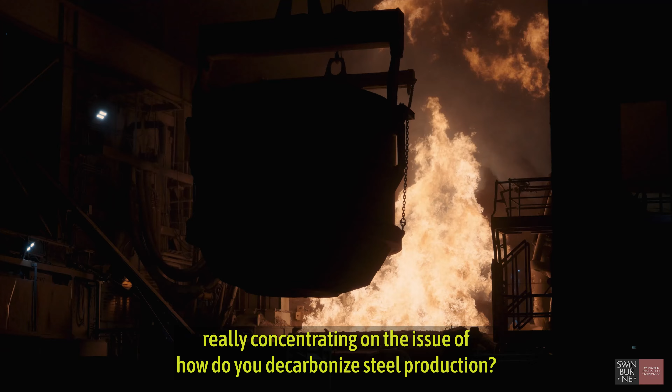If we're going to talk about decarbonising steel, we need to understand steel. Steel is obviously an incredibly successful material. I just want to bring to your attention that the building that you're in is held up by steel almost certainly. You go on a train made from steel. The rails are made from steel. You're in a house with all the goods around you, etc. So there's a tremendous amount of steel, obviously, in our society.

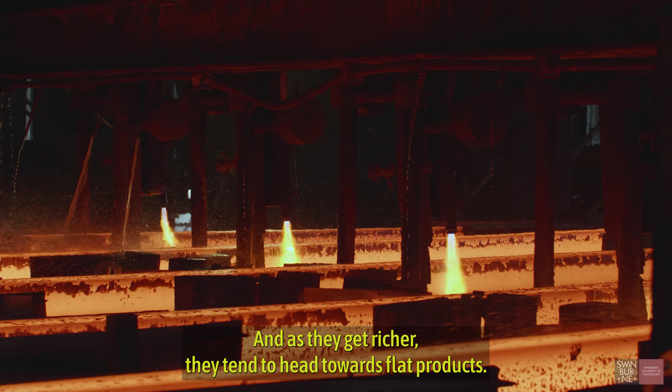Steel has a very large bearing on where you're up to in technological development. So countries obviously value steel and they want to make sure that they have a good supply of steel. The steel requirements they want change with time. They tend to go from long products, beams and rails, and as they get richer, they tend to head towards flat products, like the things you make cars and refrigerators from.

Steel also makes a very significant contribution to CO2. People estimate it's around about 10% of the CO2. A lot of people think that it's the next cab off the rank after we've been dealing with electricity supply and also transport. So there's a lot of social, political pressure around that issue, of course.

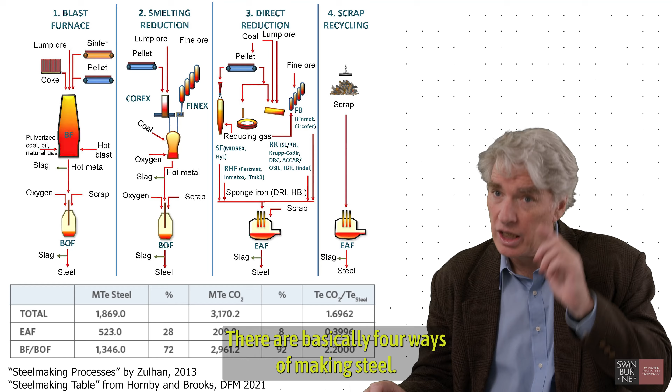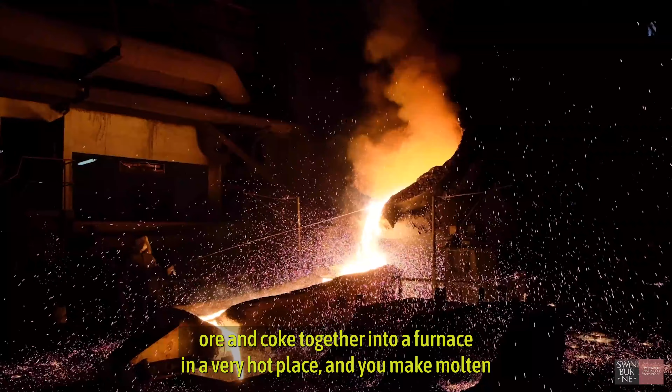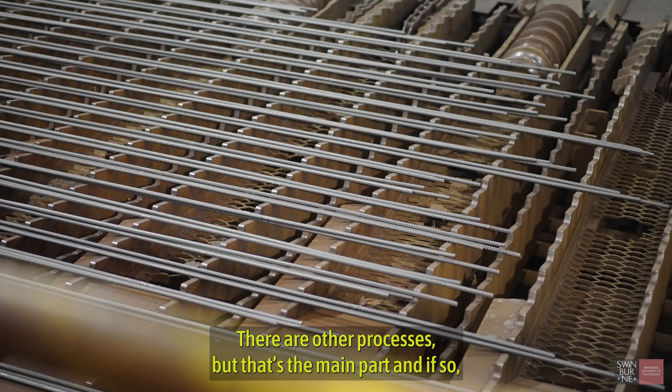There are basically 4 ways of making steel. We're going to highlight in this talk 3 main ones. The first one is the blast furnace route, where you basically bring ore and coke together into a furnace in a very hot place, and you make molten iron, which is an impure form of iron. That iron is then refined in a BOF, and you make steel. There are other processes, but that's the main part. It dominates world steel production, about 70% of the world's steel.

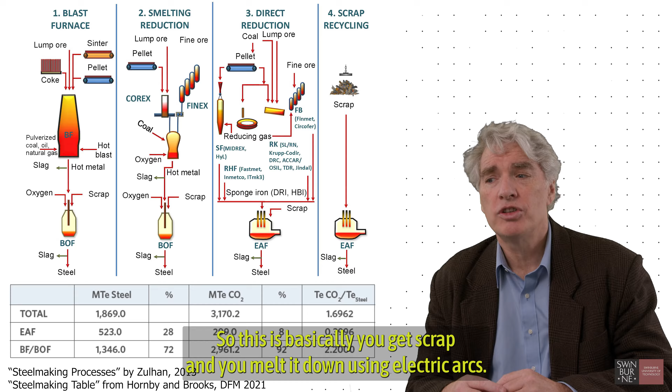It also dominates CO2. The next important one is scrap recycling. This is basically where you get scrap and you melt it down using electric arcs and then refine it and then cast it. At the moment, this is about 20% of the world's steel.

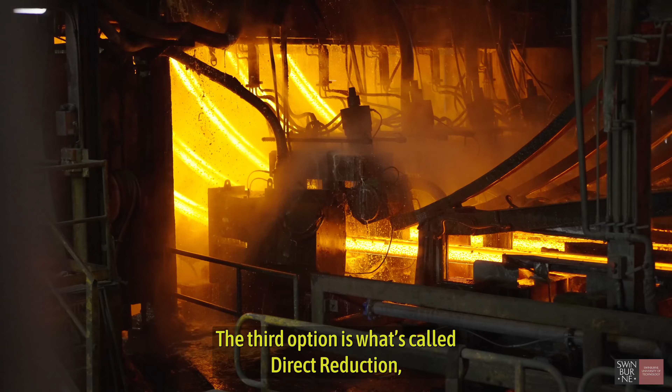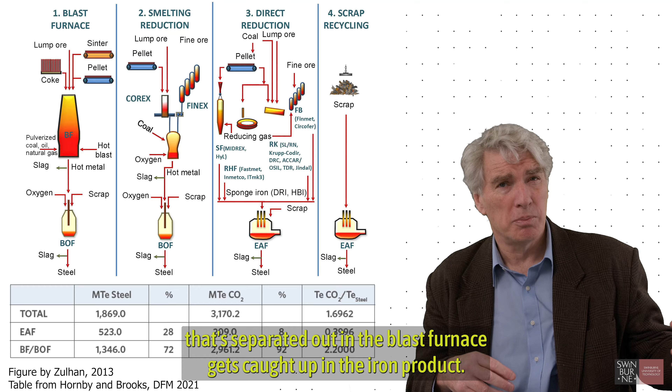The third option is what's called direct reduction. You basically only go to a solid product in the iron making step, you don't go to a liquid product. This means that all the slag and gangue that's separated out in the blast furnace gets caught up in the iron product, so it's like a low-grade iron. This is often used with natural gas instead of using coke or coal. This is then melted in an electric arc furnace, and this is at the moment about 10% of the world's steel supply. Everybody thinks that this is likely to grow in the decarbonised future, which I'll explain why.

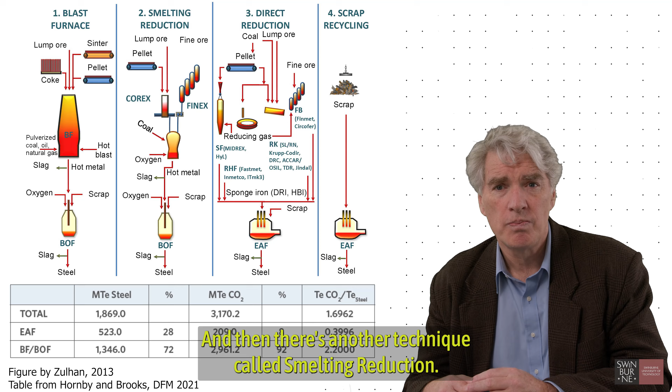There's another technique called smelting reduction. Smelting reduction is so small, I don't think we need to spend much time on it today, but it's an attempt to make liquid iron without having to use coke, basically.

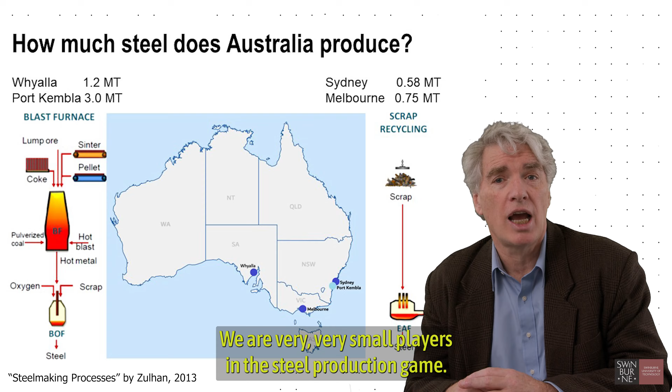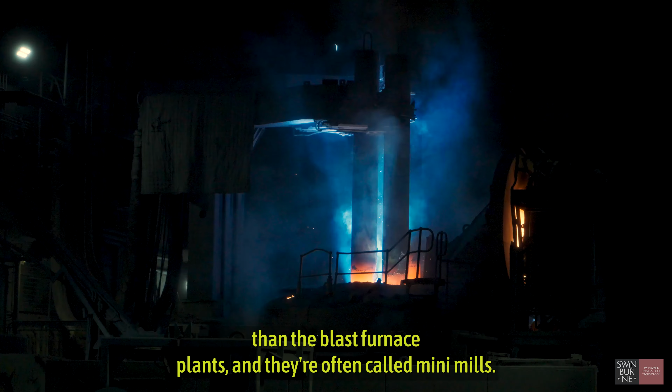Who makes steel? Well, there's about 1850 million tons of steel made every year in the world, and it's dominated by China, India, Japan, and the USA. We are very, very small players in the steel production game. We have a couple of blast furnace plants, one in Wollongong and in Whyalla, and they make 3 million tons in Wollongong and about 1.2 million tons in Whyalla. We have 2 electric smelting plants in Sydney and Melbourne, at sort of 0.58 and 0.75 million ton scale. It's very common that electric smelting plants are smaller than the blast furnace plants—they're often called mini mills. So that's part of the nomenclature in steel.

We are, however, a huge player in the game of producing the ore that goes into the steel, and we dominate export of ores. We're up around about 900 million tons of ore—an incredible number. If you go to Western Australia, up to the north around the Pilbara, you'll see enormous trains and trucks transporting vast quantities of ore. And of course, it's a great generator of wealth in our country. One of the interesting things people ask is, could we go circular and just live on the scrap?

Well, unfortunately, when you look at the scrap produced in the world, it's not really enough. It's about 40 to 50% of the requirements. In other words, we don't have enough scrap to make the steel. So we can't go circular.

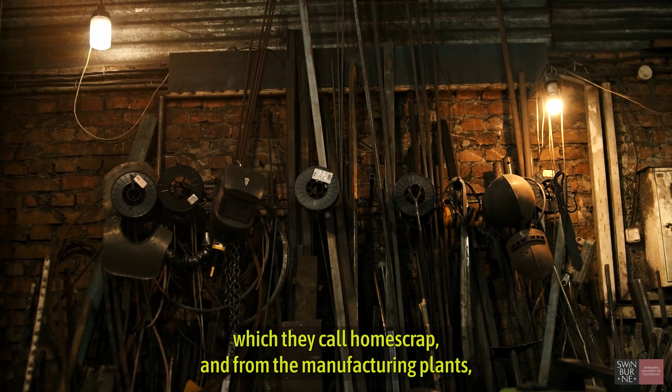But there's also issues about the quality of the scrap. So there's scrap that comes from around the plant, which they call home scrap, and from manufacturing plants, which is called prompt scrap, and it's quite good quality. But the scrap from obsolete cars and bits and pieces of machinery, etc., are often very mixed and of poor quality. So that's one of the big challenges facing the steel industry, is how to deal with this tsunami of obsolete scrap coming towards us.

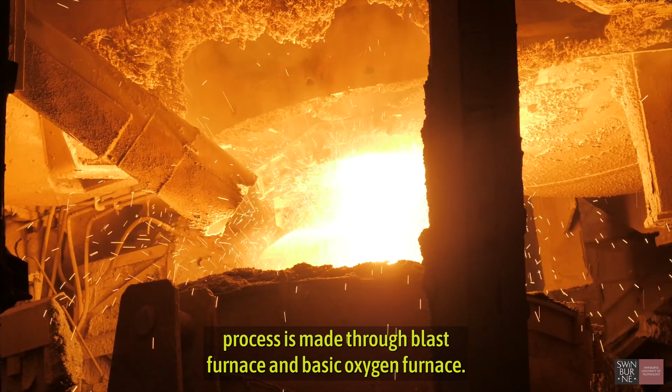Steel contributes to more than 7% of the greenhouse emissions. Now in Australia, around 75% of the steel process is made through blast furnace and basic oxygen furnace. So then it's only 25% from EAF, and we know that using EAF is based on scrap. Which means that we need to know how much scrap that we have in Australia, and also the quality of the scrap in Australia.

All right, so what are the key issues? Well, I think first of all, we need to start off with the Paris Agreement on steel. The Paris Agreement and the repercussions on the steel industry basically says that we're going to reach net zero with CO2 by 2050 to try to prevent climate change. We're going to have to reduce the CO2 by 90%. And that is a very large reduction.

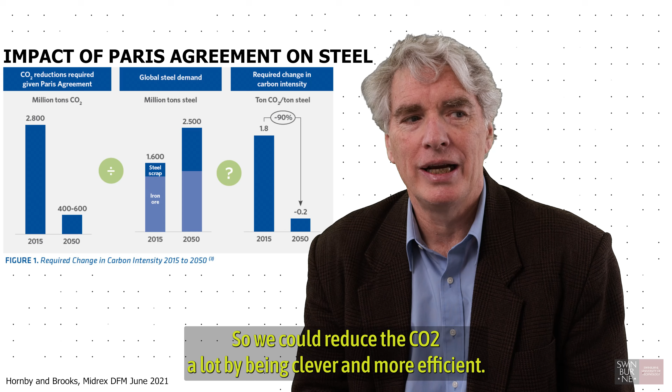So we could reduce the CO2 a lot by being cleverer and more efficient, and as engineers are very good at making things more efficient. But 90% is not something you can do by just being clever and changing the process a little bit. We're going to have to revolutionize the processes. So that's one of the important realizations that we have to make, because the steel industry for the last years—there's some big revolutions post-Second World War II, but since then we've just been improving the process, right? But that won't work for this problem.

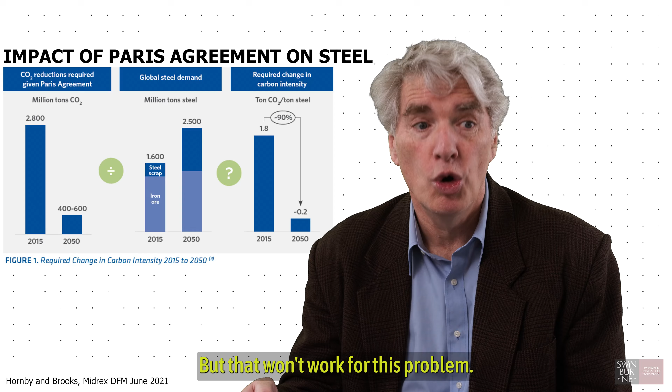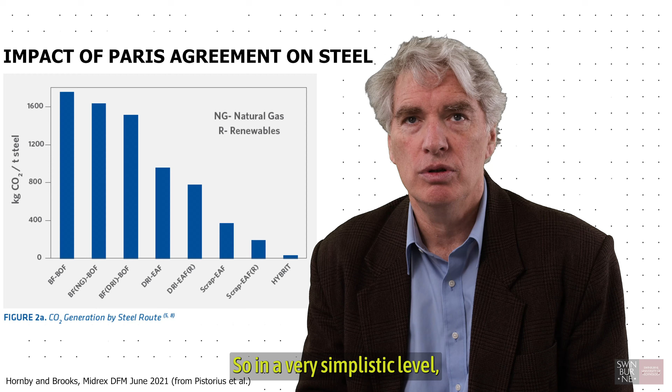People have done calculations about the CO2 from different routes of steel, and the basic analysis shows that if we can shift from the blast furnace to some sort of route where we have the DRI, the solid one, going into an electric arc furnace, using hydrogen to make the DRI and renewable energy to fire up the electric arc furnace, that we can really dramatically reduce—we can get like 80-90% reduction. So in a very simplistic level, this suggests all we need to do is turn off the blast furnaces and stick the DRI and the scrap into an EAF, and put on the hydrogen for the DRI and renewable energy for the electric arc furnaces. But as you'll see, there's quite a lot of complexity with doing that.

One of the things to realize is that when you're looking at these routes, most of the CO2 is coming in the iron making step and the preparation of the feed materials. So the steel making is relatively low CO2—it's the iron making. And that's pretty easy to understand, because what you're doing is basically taking the oxygen from the iron oxide and putting it with carbon. Our part of it is very significant because we are the world's largest iron ore exporter.

Iron ores are complex materials, you won't be surprised to know. There are really two major types: magnetite ores, Fe3O4, which are magnetic, as the name suggests, and hematite ores, which are often combined with goethite, a hydrated form of iron oxide. At the moment we're basically seeing the grades of ore decrease with time. You'd say a high-grade ore was over 65%, and below 62% you'd say it's a low-grade ore. The gangue minerals in this, like silica and alumina, make a big impression on the post-processing of these materials. You end up with a lot of slag generation, and you may have trouble with quality.

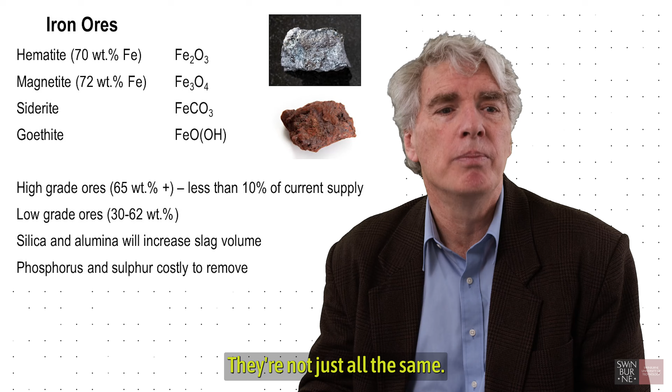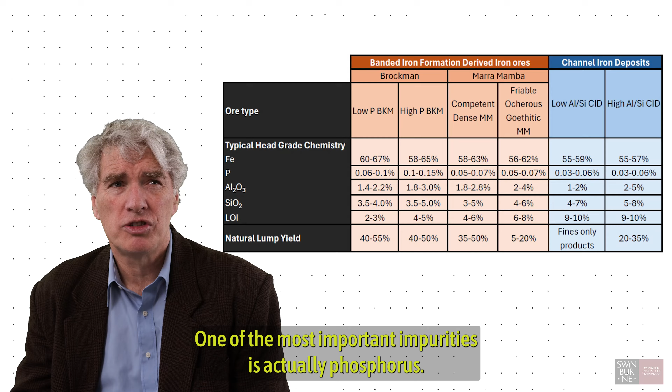So there are issues in iron ores—they're not just all the same. A lot of the iron ores come from the Pilbara, where there's a lot of hematite goethite ores. With time, the impurities build up, particularly alumina and silica. One of the most important impurities is actually phosphorus. Phosphorus is really bad for the quality of steel—you only need a very small percentage of phosphorus in a steel for the quality to become very poor.

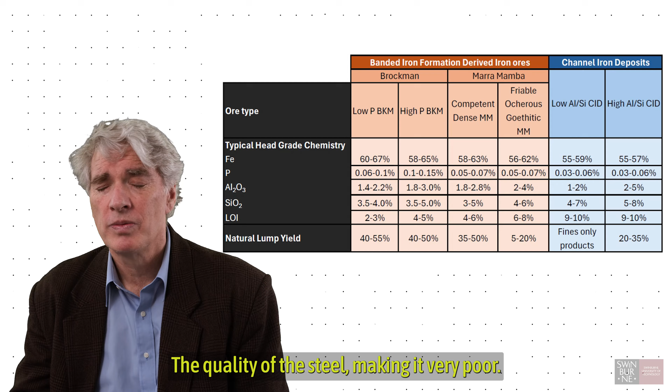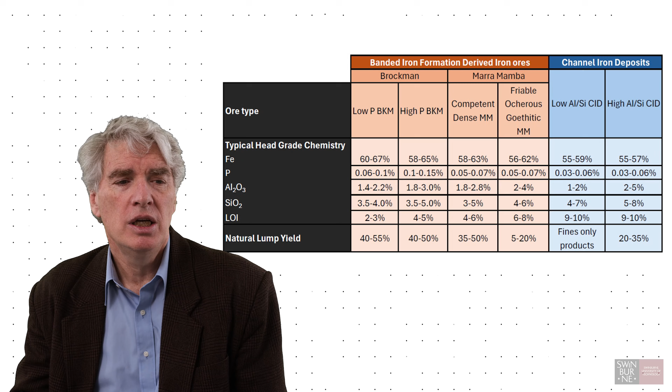So these ores are heading southwards in terms of their quality. So how do we go green while we're dealing with this lowering of quality of ore? People estimate that only less than 10% of the ores that are sold are in this high-grade area.

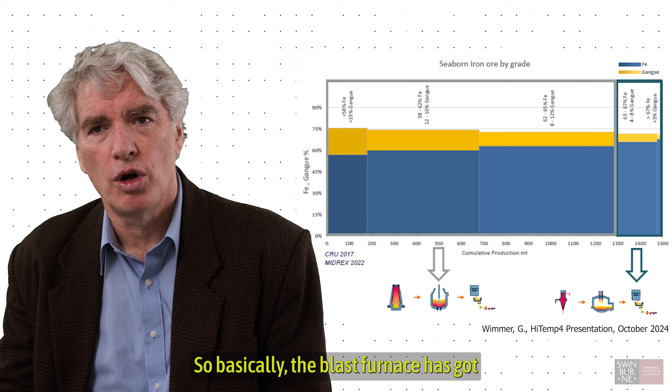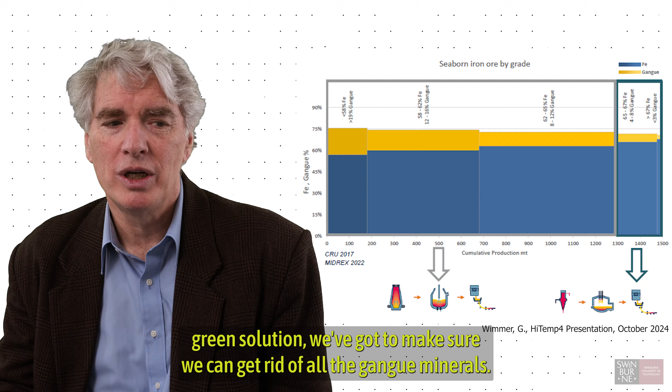The blast furnace has got really good at getting rid of all these gangue minerals. That's one of the big advantages of the blast furnace. So if we're going to go to a general green solution, we've got to make sure we can get rid of all the gangue minerals. That's one of the great advantages currently of the blast furnace. And it's naive to think that we could just do that straight away with the existing technology.

Before we get into some of the details of hydrogen iron making, I think we need to take stock and look at what we're really saying here. So the summary I would put it is the following. At the moment in the world, we're making most of our iron, 90 to 95%, by getting iron oxide from the ground, putting it together with a form of carbon and some fluxing materials, making liquid iron, some slag, and some CO2. The other way that we make it is we get some iron oxide from the ground and we put it together with natural gas and we produce a solid iron with some water and some CO2.

That's the other way. The two main ways that people are proposing at the moment to substitute for that: to introduce hydrogen. We know that hydrogen can also reduce iron oxide to iron. We know that works, we know it can happen. At the moment, it's a small technology, but we see prospects of growing it. So that's one obvious route, using hydrogen.

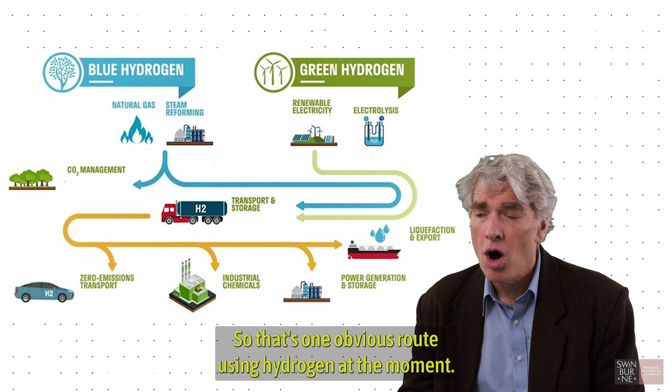At the moment, hydrogen generation is dominated from a hydrocarbon source, which they call blue hydrogen, which is essentially getting methane and breaking it down. And this will generate CO2. So that's obviously not the long-term answer.

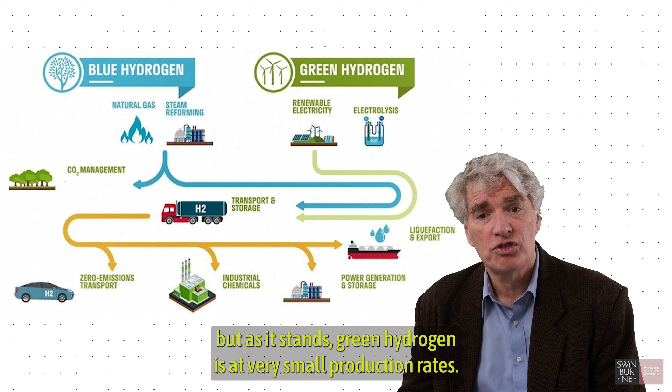People are trying to promote green hydrogen, but as it stands, green hydrogen is at very small production rates and it's currently already quite expensive. People are hoping that we can get the costs down, but it's a major challenge.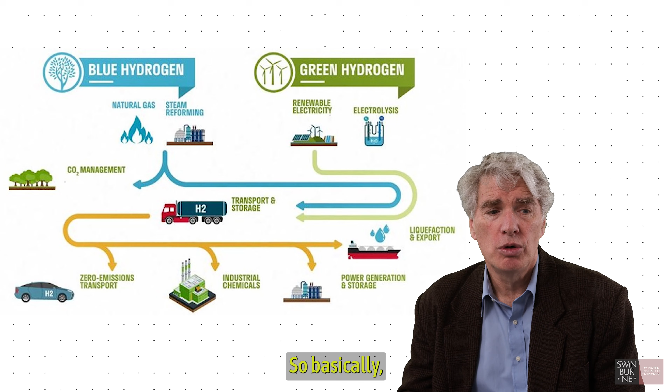To give you some sense of the scale, for a steel plant you need gigawatts of hydrogen production in terms of electricity usage, and we're currently producing things more like megawatts. So this is a big issue - how do we scale up this technology? I suppose who's also paying for it is a big issue, and as I said, the cost.

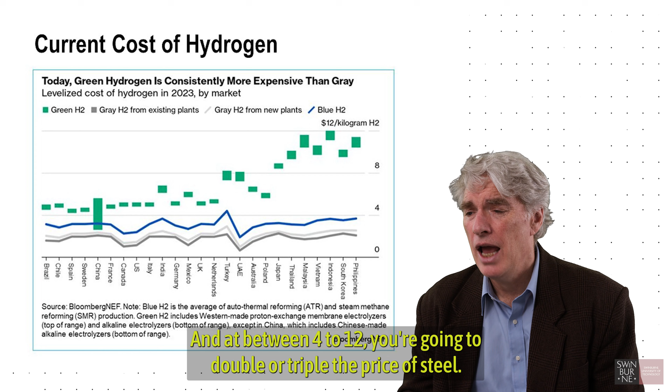At the moment, green hydrogen is selling between $4 to $12 per kilogram, US dollars. And at between 4 to 12, you're going to double or triple the price of steel. So obviously that's a very big consideration, and people are trying to find ways to reduce the cost.

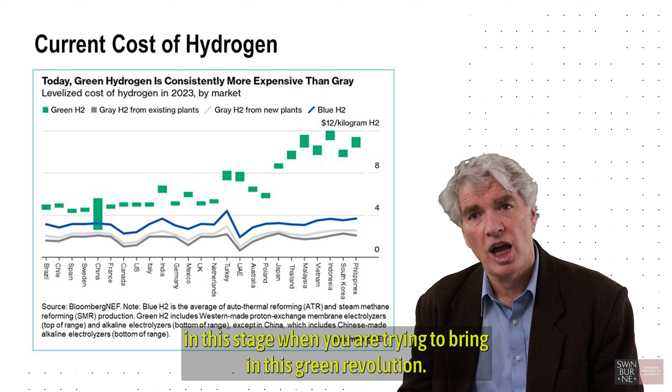It has a lot to do with scale. And there's also quite a lot of policy discussions going on at the moment about maybe the government needs to intervene in this stage when you are trying to bring in this green revolution. People are hopeful that in 10, 15 years from now, hydrogen will be a much more reasonable cost, maybe $2. But even at $2 or $3, we still have issues about, as I mentioned, the gangue and how the processes will work for these general ores.

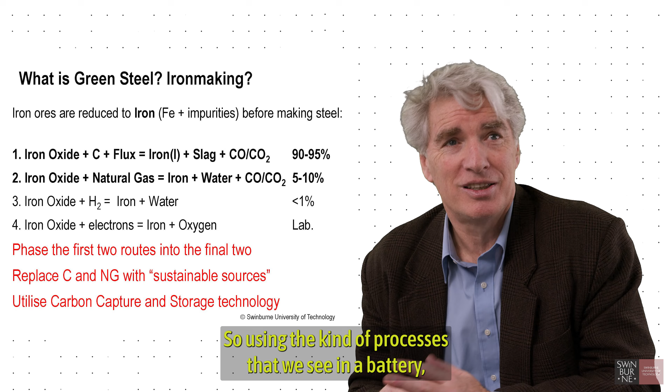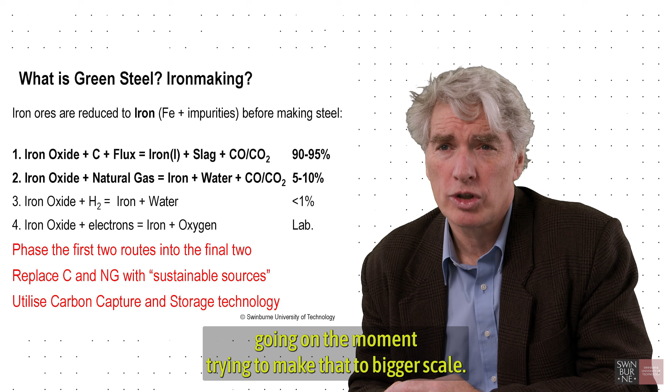The next obvious one is using electrons, which is basically saying using electrochemistry. So using the kind of processes that we see in a battery, but in reverse, and during the electrolysis we can also make iron. That we know is scientifically possible. At the moment, that's really at lab scale, but there's quite a lot of work going on at the moment trying to make that to bigger scale.

There are two other kind of ideas that you could also use in addition to those two chemical solutions. One is to say, well, it's really difficult to get rid of carbon, so instead of replacing the carbon, why don't we get the carbon from a sustainable resource, like some biomass? Why don't we grow carbon and only consume the carbon that we grow? Then you could argue that we're creating a circular carbon type steel industry.

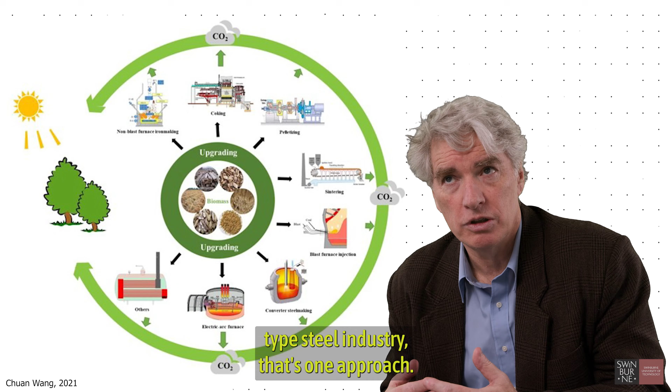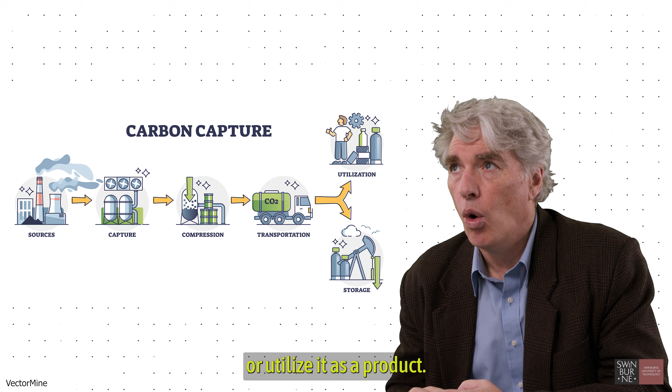That's one approach. Another approach is to say, why don't we just capture the CO2 and either store it in some safe underground facility or utilize it as a product. So I'm going to be mainly emphasizing hydrogen in this talk, but explain a little bit about those other ones.

And the reason why I'm emphasizing the hydrogen route is because, to be honest with you, I think it's the most likely one. So let's have a look. I think we need to start off looking at, well, could we bring hydrogen into the blast furnace? That's a pretty obvious question. Do we need to get rid of the blast furnace, or could we introduce hydrogen into that blast furnace?

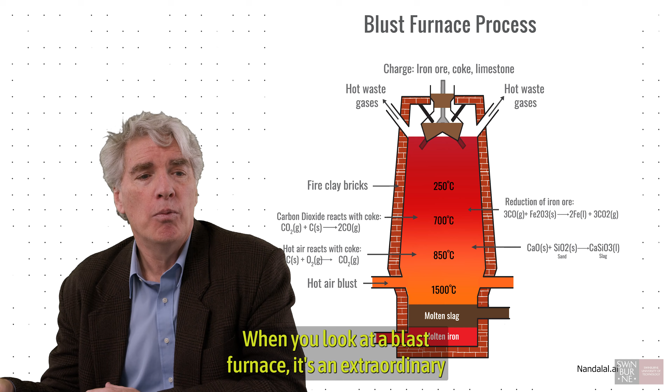When you look at a blast furnace, it's an extraordinary development, built up over 300 years. You have this big tall column, up to 100 meters high - an impressive piece of machinery. You have layers of iron ore and coke descending in a column, and hot gases coming from the bottom, at the tuyere line, where they inject these gases, getting over 2,000 degrees C. So this is serious pyromania going on here. You get a really good reaction going up this column as the ore descends.

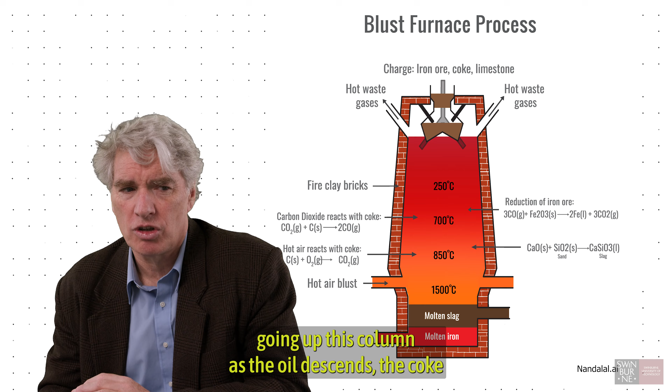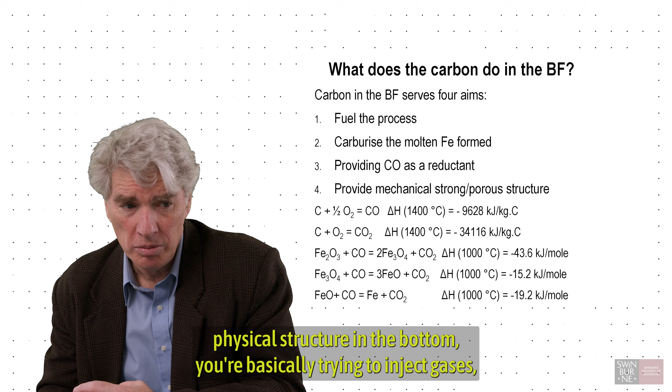The coke plays a very special role in this column. Not only does it fuel the process, but it also provides the CO gas for reducing the iron oxides. It also provides mechanical structure in the column. And that's one of the big challenges - if we bring hydrogen into this system, what will provide the physical structure to the column? Because if you don't have physical structure near the bottom, you're basically trying to inject gases into a whole lot of molten materials, and it probably won't work.

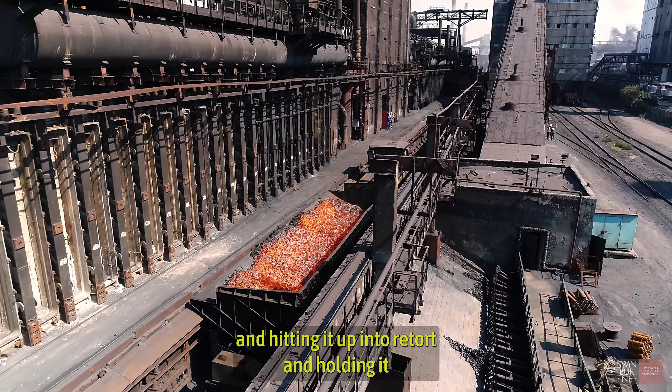You may be interested to know that we used to use charcoal, and when we used charcoal instead of coke, they had to make the vessels much smaller because charcoal is not as hard a material as coke. This development has seen us learn very well how to prepare the feed materials to make this blast furnace reactor work well. Unfortunately, it involves probably the least desirable part of the current steel process, which is coke making - getting coal and heating it in a retort for up to 1,000 degrees for quite a few hours. It creates a lot of volatiles, and there are issues with pollution from coke ovens. So coke ovens are not a desirable part of the steelmaking process, and they also contribute to CO2.

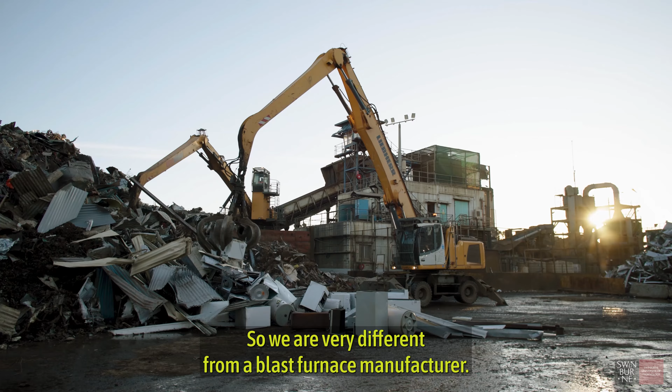Infrabuild is an electric arc furnace based steelmaker. We have 2 electric arc furnaces, one in Laverton in Melbourne and one in Rooty Hill in Sydney. They use steel or scrap steel as the ferrous source that goes into it. So we're very different from a blast furnace manufacturer, and because of that, we naturally have an advantage because we're a lower emitting process in terms of steelmaking.

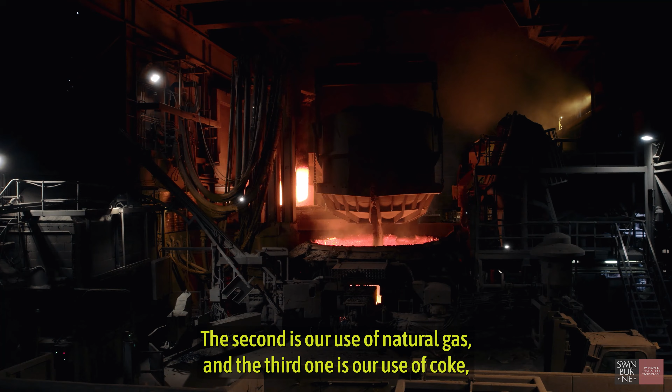We very much understand that there are 3 major energy inputs that contribute to our emissions. The main one is the electricity we use to make the steel that comes out of the electric arc furnace process. The second is our use of natural gas, and the third is our use of coke, which comes from coal that is dug out of the ground.

For each of those, we understand there is a journey for us to move from grid electricity, fossil fuel-based electricity, to renewable. The second is around partnering with industry, with regulators and government, around being a long-term customer of alternatives to natural gas - for us, that's primarily a biomethane product. And the third part, where we currently use coke made from coal out of the ground, we're transitioning to using forestry byproducts - sawmill and logging offcuts that have no other use - which we can turn, through an industry partner we are developing a technology with, into a biochar, a coke replacement product. This stops it from being a product derived from coal out of the ground, and makes it a renewable product that comes from the byproducts of the forestry industry.

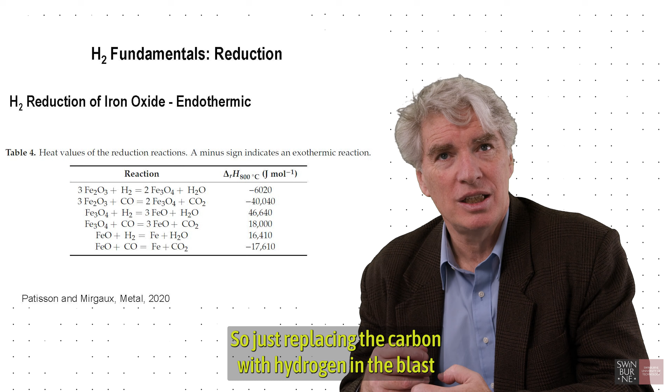One of the most important things to understand about the hydrogen approach is that the reactions associated with carbon are exothermic - this means that when you react them with the iron oxide, you're giving out heat. But the reactions with hydrogen are the other way around - they're endothermic, meaning they require heat. So just replacing the carbon with hydrogen in the blast furnace will change the whole heat balance of the furnace, and that's not a trivial matter.

There's been quite a lot of work going on. In Germany, ThyssenKrupp have been doing experiments putting hydrogen at the tuyere line of their furnaces. They found that they could get some hydrogen up to a certain level, but at a certain point it doesn't work, because essentially they are cooling the furnace down too much. Current research suggests you may be able to replace, say, 14 to 32 kilograms of hydrogen into the furnace before you start creating problems, and you may be able to reduce the CO2 by up to 30%, which is not anywhere near the 80 or 90% that we're talking about that's required.

So as it stands at this moment, it doesn't look like we can get the hydrogen into the blast furnace.

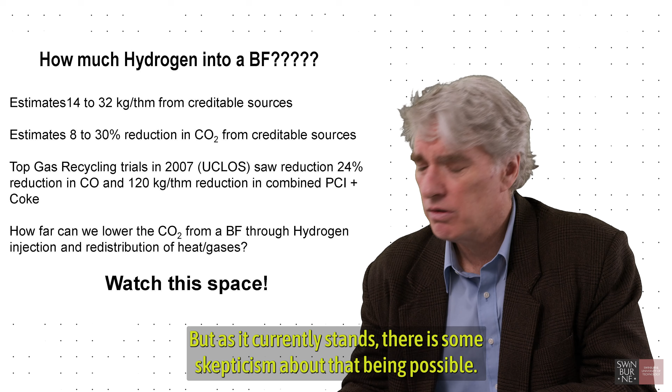Watch this space because there's still a lot of innovation that can go on in this area. I'm aware of research, something I'm involved with, trying to save the blast furnace to see whether we can push it higher. But as it currently stands, there's some skepticism about that being possible. The blast furnace's death has been long predicted for many years. It's extremely resilient technology, and people don't easily bulldoze this technology, which they've put so much money into. There's so much capital tied up with the steel industry, it's difficult to just bulldoze something and say let's try another technology, until the arguments are compelling. You can see around the world a bit of pushback about doing that.

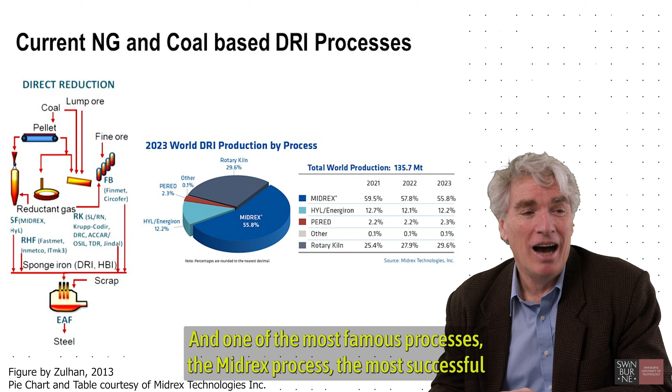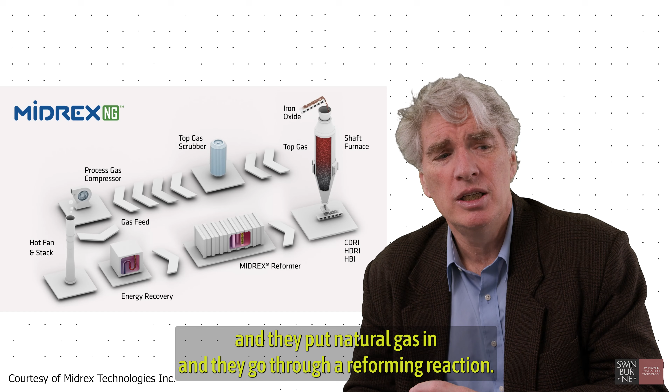Then we look at the DRI processes, which currently have several variations - there's shafts, fluidized beds, drums, and kilns they call them. These processes are quite well developed for natural gas in particular, and people say, well, let's just replace the natural gas with hydrogen, and that's a good idea. One of the most famous processes, the Midrex process, the most successful of the shaft processes, is a bit like the top part of a blast furnace. It's essentially got a shaft, and they put natural gas in, and it goes through a reforming reaction, making CO and hydrogen going through the shaft. This is well established and makes a lot of iron in the world already. This process has already been demonstrated for quite high levels of hydrogen, so this looks like a ready solution, basically.

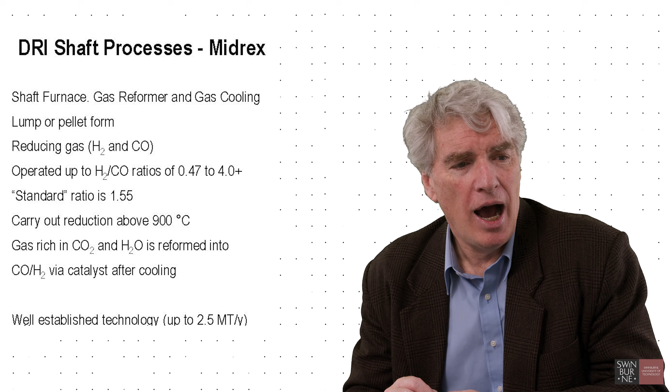Hydrogen steelmaking is a very promising area, and we believe that very soon it can take over the industry, because we want to reduce carbon dioxide from the atmosphere, and hydrogen can be a very useful tool in that, because we can replace CO2 by H2O. H2O is basically water, so that means we can reduce a lot of environmental pollution. They already operate the Midrex with hydrogen to CO ratios of up to 4 - in other words, almost 100% hydrogen. This is really a well-established technology, and the obvious way companies would like to go using hydrogen. I should tell you, these furnaces are not generally operating with high-gangue ores, so we go back to that ore problem. This has been developed for rich ores. It doesn't mean it cannot be used for high-gangue ores, but it's certainly a part of the process that needs to be understood - the sort of research I do.

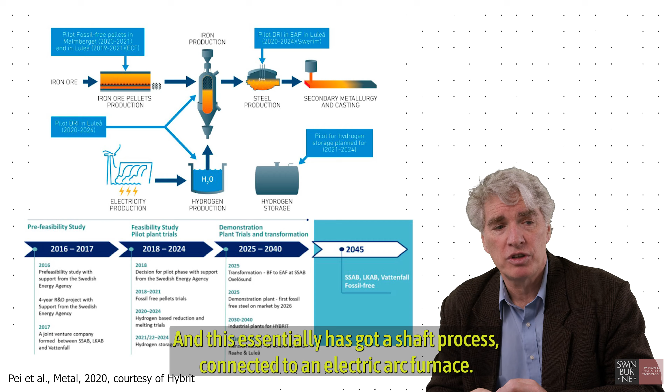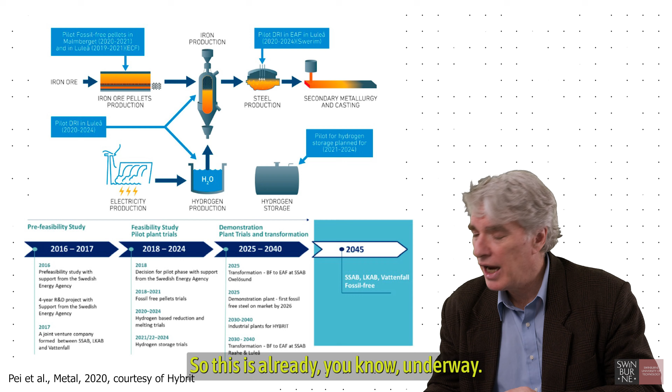There are variations of this, and one of the most interesting at the moment is the HYBRIT process, being developed in Sweden. This essentially has a shaft process connected to an electric arc furnace, and they've been making essentially zero carbon steel using this at pilot scale. There's quite a lot of development in Sweden along these lines. They have very rich ores, and they also have cheap renewable energy, which is one of the reasons they can do this.

There have already been hydrogen iron making plants running at industrial scale. There was one in Trinidad some 20 years ago that made industrial level iron using a fluidized bed process, a 2-stage process. There's one being developed at the moment in Korea called the HyREX process, which is a multi-stage process, and there's also one in Austria being developed as well. So there's a lot of work at the moment. The reason they're going for these fluidized beds - in the fluidized bed processes, you can just use fines, you don't need to make pellets or pelletize the material. You can just get by with fines, which saves quite a lot of cost.

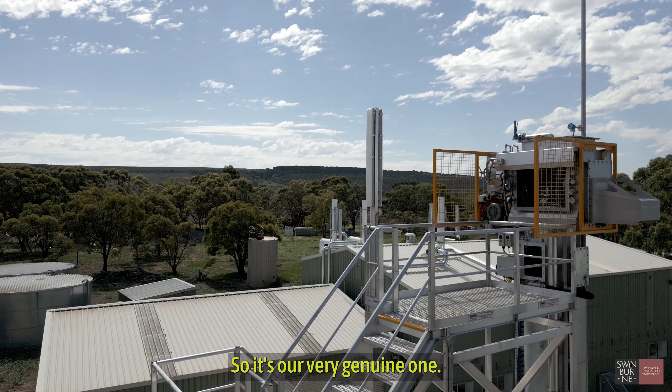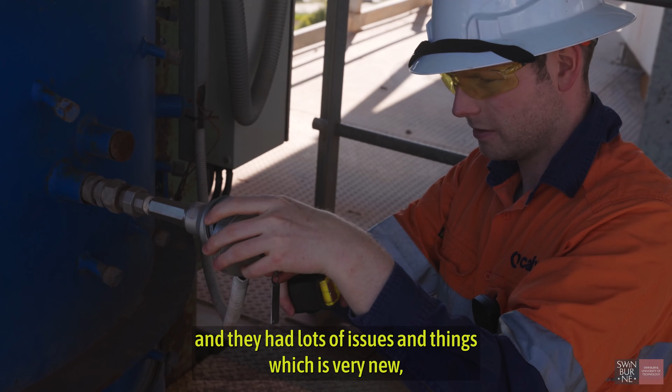I'm happy to report that in Australia, we're also developing our own process, called Zesty. This is the project I'm leading, so this is the exciting real Australian iron making project. What we're doing in Australia is in Bacchus Marsh in Victoria - it's our very genuine one, and we're building a new iron making process. We have done pilots, and at this stage, this project is called Calix, a company, and the process is called Zesty, and they're building the demonstration plant. As they're building it and developing it, they have lots of issues and things, which is very new, very natural for any process.

So what we do at Swinburne, we help them develop it. It is quite exciting. One is Australian, and another thing is it has zero carbon emissions. So that's also very interesting.

We've been talking about hydrogen quite a bit, but there are other ideas. The most obvious one is electrolytic. People have known for a long time that you can use electrolysis to break oxides down to metals and oxygen. This has been known for quite some time, for 100 years at least. This is the major way that we make aluminium, so it's already an established route.

There are three basic ideas going on at the moment. One idea is to do it in molten oxides at high temperature - put the ore into a molten oxide, put electrodes in it, and make iron. A second idea is to use molten salt, to put the iron oxide in, say, molten chlorides at a lower temperature, around 900 degrees. And another one is to do it at low temperature using aqueous solutions with different acids and basic systems.

They all have their merits, and there's not a simple, obvious answer as to which one will be the successful one. This is a very active research area at the moment around the world.

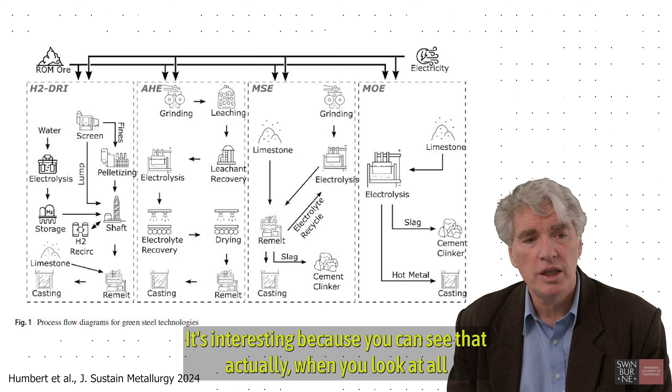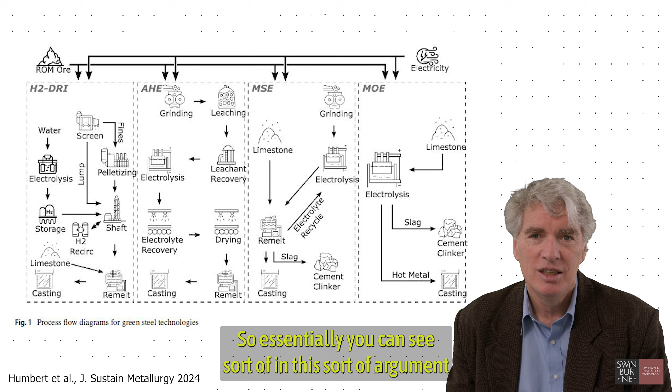It's interesting because when you look at all the stages and steps required for hydrogen DRI to make steel, these ones have fewer steps. The reason is because you're not making hydrogen. So essentially, hydrogen is the middleman - you're basically using renewable energy to make hydrogen, to make metal, whereas in the electrolysis route, you're just using the electrons directly. So there's an interesting aspect of these electrolysis routes.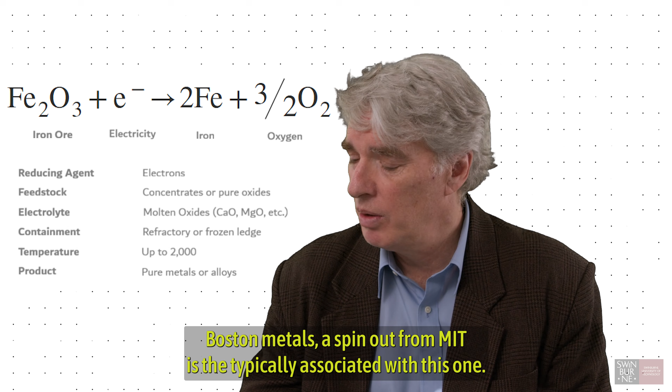There are a number of developments going on. The one I'm most familiar with is molten oxide electrolysis. Boston Metal, a spin-out from MIT, is particularly associated with this one. They've been working on molten oxide electrolysis above 1600 degrees C, and you end up making iron and oxygen. One of the big challenges is what to make the anodes from.

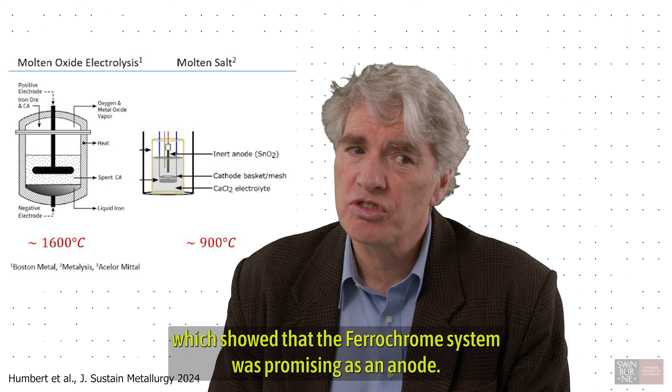You've got to have electrodes in this system, and the most challenging one is the anode. There was a paper published in Nature in 2013 which showed that the ferrochrome system was promising as an anode. I don't think ferrochrome anodes are the general solution, but this is where you see this green revolution leading to other scientific developments, because we're going to have to do some very sophisticated material science to develop these anodes. I'm aware of two projects in Australia at the moment, one of which I'm directly involved with, trying to develop anode materials. So that's an exciting area.

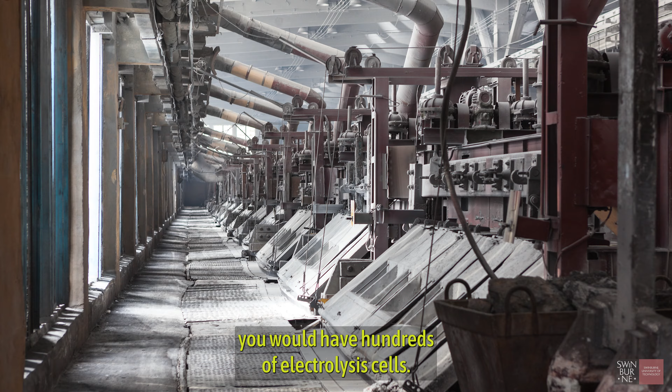These molten electrolysis routes still have a long way to go - they're very small scale at the moment. One repercussion of going this route is that instead of having one big large reactor like we currently have, or two with blast furnaces, you would have hundreds of electrolysis cells. How you would couple hundreds of electrolysis cells to the existing steel structure is not clear. It makes you wonder whether the future of this is maybe on a greenfield site, where you were starting from scratch and could just reimagine the steel industry. That's why I think this electrolytic route could succeed - it's very difficult to imagine this being done at an existing steel plant because it's not really compatible with the current equipment. So that's a very interesting area of development.

Another potential route is biomass. This is based on the idea that if we're growing crop material or trees, or using waste material, could we use it in the steelmaking process to replace the carbon? This is not a new idea - it's been around a long time. In fact, steel used to be made from charcoal, not from coal and coke.

It's been well researched, and basically, to make it useful at the iron making stage, you need to turn it into a char. But we know a lot about making char - that's something humanity has done a lot of. The issue with char is that it's not as strong as coke, which means you probably cannot just directly replace coke inside the blast furnace with it.

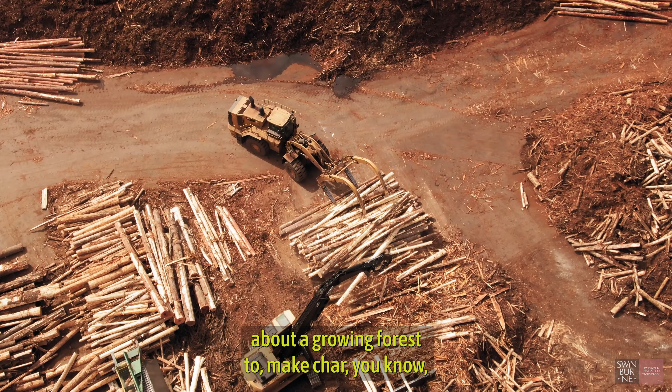But you can use char in all other parts of the plant, and there has been extensive research trying char all over the steelmaking process. So, well understood. What generally holds the biomass route down is cost and availability. Gathering up all the different biomass materials and turning it into char adds significantly to the cost. There's also a political and social aspect, because a lot of people would object to growing forests to make char.

And there are also arguments about how you can prove you're bringing in the amount of growth from the forest to match the production of the plant. But I think where it could succeed is where you have large amounts of biomass waste. That's where it could succeed.

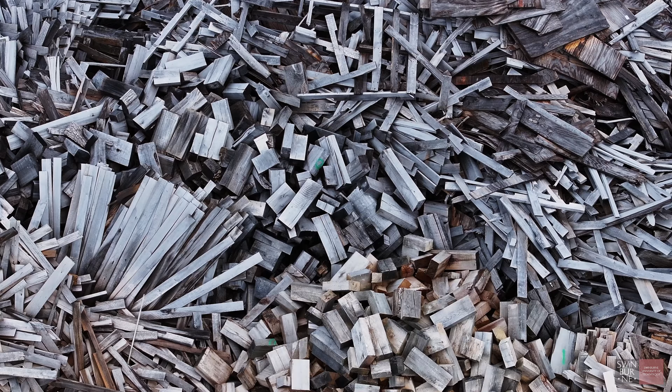There are people exploring that at the moment in Australia. Rio Tinto has a process called the bio-iron process, and their idea is to combine iron ore with waste char and process it in a microwave heating system, which is very interesting, to make iron. I'm sure this can scientifically be achieved, I have no doubt at all. I've actually worked on something very similar myself some 30 years ago. But the issue is, can we get enough biomass to get anywhere near the scale of production we're talking about?

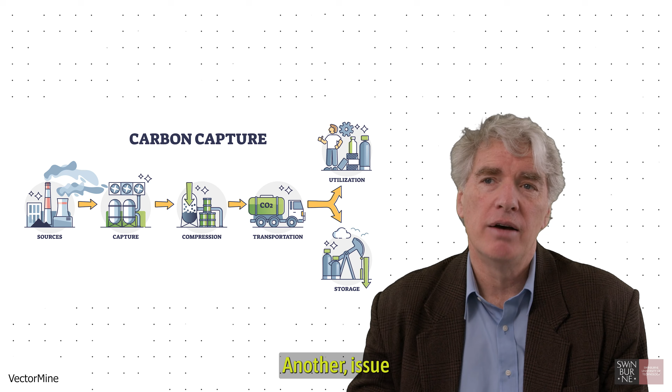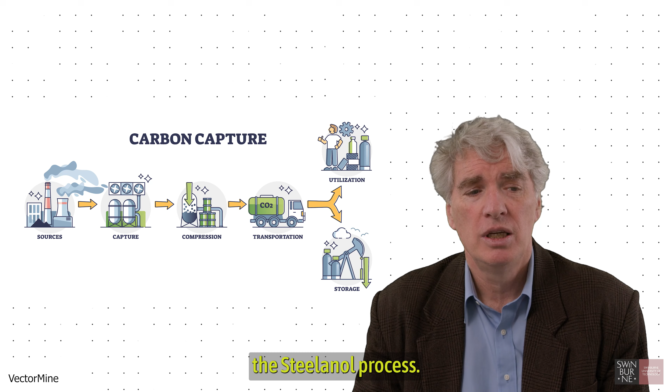Another approach is to go for carbon capture or storage. There's work going on in Belgium at the moment called the Steelanol process, where they combine the off gases of the blast furnace with some biomass waste material and generate bioethanol. This bioethanol is being produced at significant quantities, and this has been going for a few years, which is quite exciting. I suppose the only hesitation you'd have is, how much bioethanol do you need, and can it possibly take up the CO2 produced from a large steel plant?

I think that's true of a lot of these CO2 utilization technologies. Yeah, you can do this, and it's quite expensive to do as well, not a cheap thing to do. I think the Steelanol plant cost €200 million, and it only processes a fraction of the CO2 from the blast furnace. Also, who's going to take all that material? So that is a partial solution. I'll be surprised if that's a general solution for the reasons I just described.

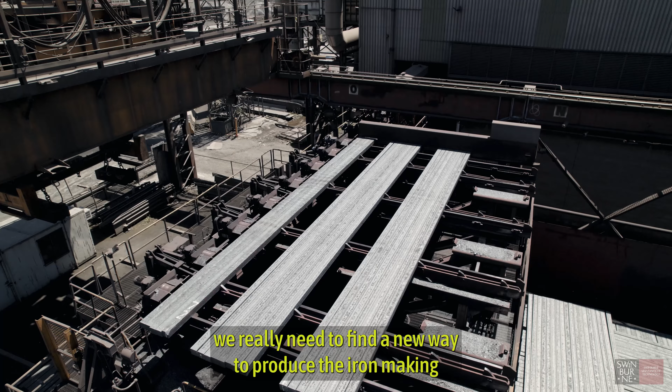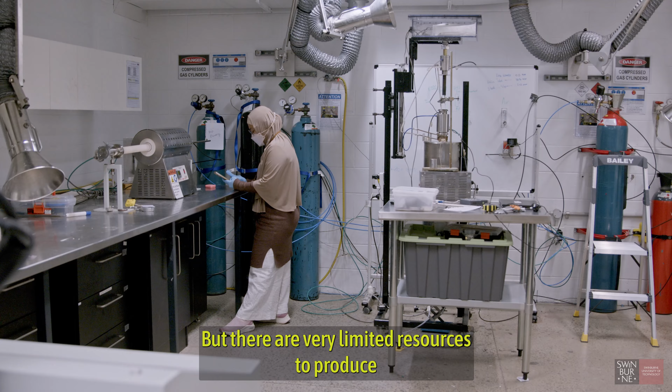Steel is something really important for human life. This is something we cannot live without. So for making steel production sustainable, we really need to find a new way to produce ironmaking in a more environmentally friendly process. Many of us are focusing more on the hydrogen process, but there are very limited resources to produce green hydrogen, and it still requires a lot of energy and money to produce the green hydrogen to be used for steel production.

So I suppose, in summary, the challenges for hydrogen DRI: do we have enough renewable energy to make the hydrogen? Do we make enough green hydrogen, which is associated with the same thing? And how do we process these lean ores? How are we going to do that? Do we need to make pellets to put into these shafts, or could we just use fines and directly feed them into these DRI processes? These are some of the things that researchers like myself are dealing with in this hydrogen revolution.

I think what we need is people who are very curious, a bit brave, and very resilient. This is something you really need if you want to be involved in this. Resilient means you don't give up. You just fail one day, you show up the next day, and you fail the next day, you show up the third day. So this is what we need, people with curiosity.

And you don't have to really know a lot about this stuff. For example, I have a mechanical background, I didn't know about metallurgy that much. If you asked me three years before, I literally didn't know anything. So I was Googling as I was going. It's really a fresh start. But when you get sucked into it, you learn a lot, and you are surrounded by people who know a lot.

And as a group, the high temperature processing group is very welcoming. We celebrate diversity, we celebrate different kinds of people. We also do a lot of knowledge sharing among ourselves. So I think when we have this kind of people joining in, you will be well supported anyway.